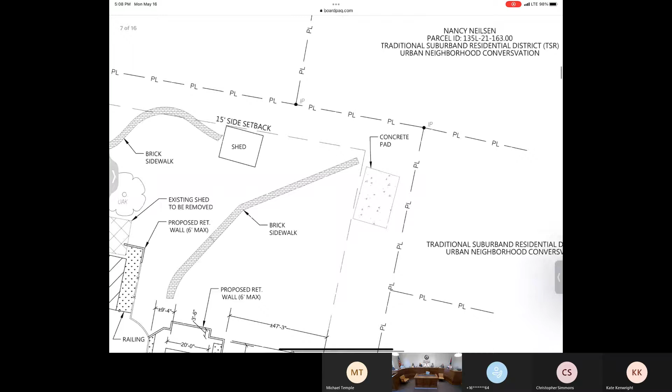The request is for an addition on one side of the house, also the addition of a pool, and some other modifications. The request does not include the new carport or a demolition of a small outbuilding that is there. Frank, welcome. Thank you, Frank Tindall, representing Dr. Walker and Melissa Swaney.

So let's just start with the pool. Like Kate said, it's very simple, it's just a rectangle, dropped down 18 inches. It's not visible from anywhere but the property and the house. I do have fencing all the way around the whole yard, and we're working with some existing retaining walls on the house side of the pool, and on the back side are new retaining walls that will be less than 6 feet, hopefully about 4 feet.

So we're connecting the existing brick sidewalk and steps, and then the decking around the pool will be bluestone, and then we'll do appropriate landscaping.

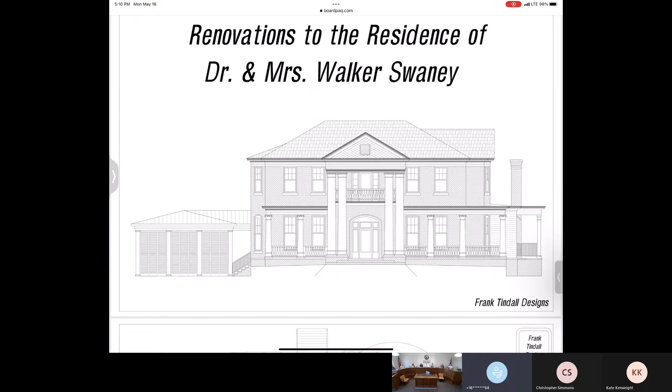It's certainly one of our most attractive residences, and you do such a good job of keeping it attractive and celebrating events, so we appreciate that very much. Any questions or comments, maybe if you took us through a couple more of the...

Well, do you want to go ahead and talk about the addition now? Are we done with the pool, or do you want to vote on it? No, go ahead and tell us about the addition too. Okay, please. All right.

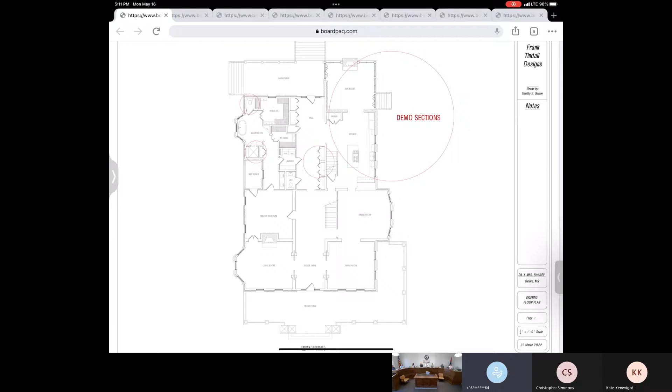So the addition, that's existing kitchen and family room. If we go to the floor plan, the new floor plan is here. We're going to renovate the new kitchen as is. There are 3 windows in the kitchen wall, and we want to eliminate one of them that's not original. The other 2 original windows we'd like to put together over the kitchen sink, so we'll have more cabinet space. And then we add 12 feet out to the south, which is a pantry, and 12 more feet to the existing family room.

The existing family room has square pilasters with windows in between, and when we add the 12 feet, we have the exact dimensions to keep the symmetry going with the windows between the columns, and it looks more like a sun porch. And then there's a small 6-foot porch on the south side of that.

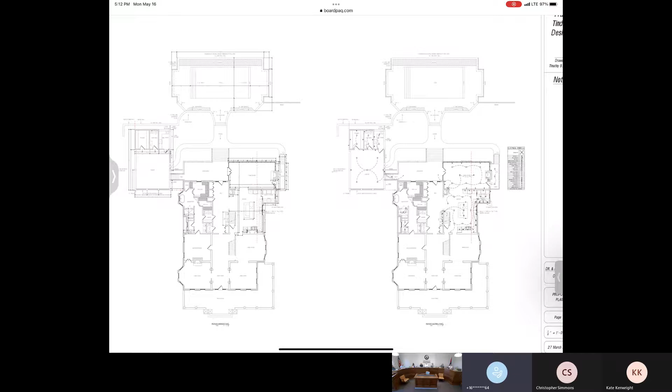All of that existing addition is all painted. We'll be using no-rot products that look like wood, and in the pantry area we're proposing to do horizontal hardy board, painted white. We'll be patching the kitchen window, the second one from the bottom, where I have the windows put together.

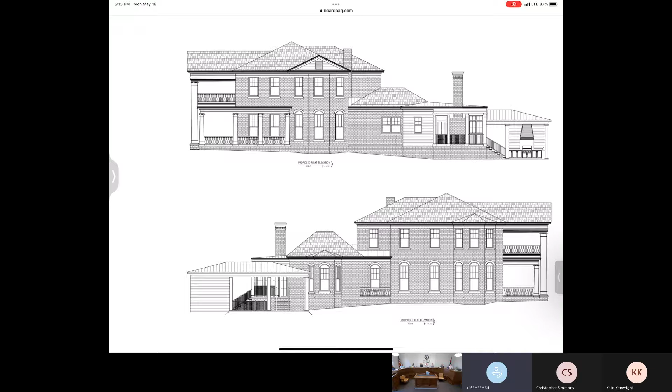We'll be patching that brick. I've located some antique red brick that's close, but we're still looking for the perfect match, and we may be able to use the existing brick we have. When we go into the pantry area, we could steal a few bricks from that 9-foot section, and we may be able to gather enough bricks there to make that wall look like it's never been patched.

And Kate said copper roof, but we may be doing copper-colored metal just for cost.

The fireplace right now would be in the view of the pool, and it was built incorrectly, so we're going to put the fireplace on the south side so we can view the pool and get a better working fireplace. It will be red brick.

This is really not easily noticeable from the front view of the house, with a lot of vegetation. So nobody, when you drive down the street, will know what we're doing. Yeah, really.

Will the fireplace be the same color as the house? Because you can see that from the road. Yes, red brick, just due to the height of the fireplace. Right, red brick.

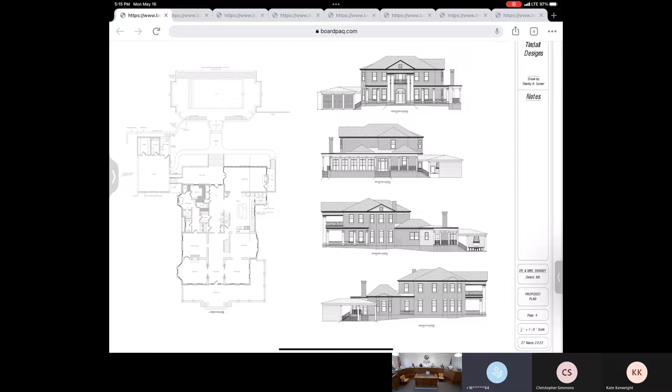We have a phase two on this that we're still asking for permission for. Over on the side of the house, on the bottom picture, there's a carport - if you zoom in, that little window with the little balcony, that's a small porch with a window on it, only about 4 feet deep. We were proposing to do a little bit of renovation in the bathroom and bring that wall out to the railing, where it's just a foot deep, but it would look the same as it looks now.

I thought of an option for that wall, because we're going to have to remove those bricks - maybe reuse those bricks over on the kitchen window and put siding in there, if anybody objected to that. I think we could go either way depending on the bricks, if we have trouble finding them.

Does anybody have questions about the modifications and the addition on the rear of the house and the new fireplace chimney, which are the official requests today?

If nobody does, then I'll accept a motion to approve those items as presented. I'll second. We have a motion and a second. Is there any other discussion on that question? If not, all in favor signify by saying aye. Aye. All opposed?

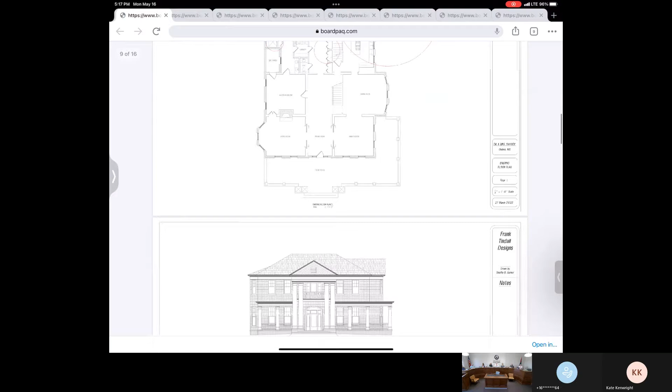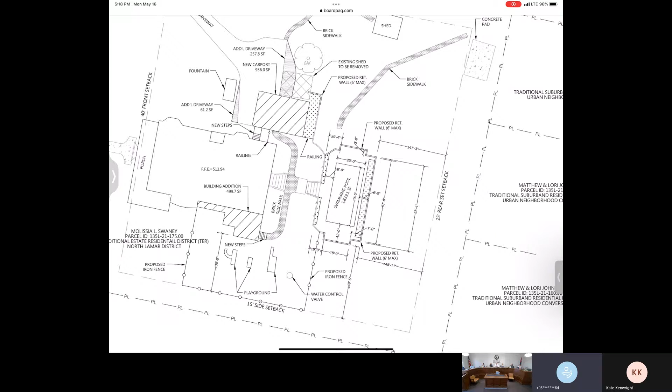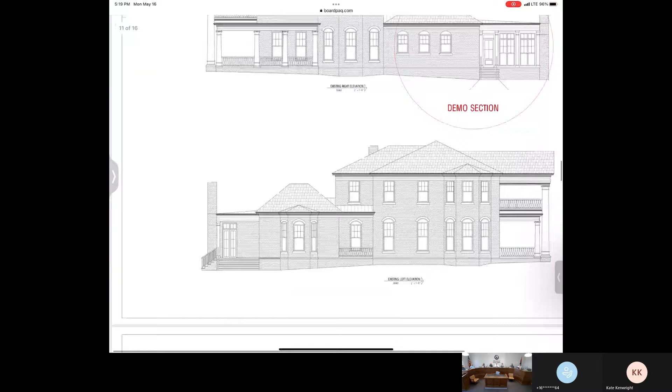We do have another outbuilding that's a charming little building on the back side. Looking at this building, we can't add on to it to make it a carport or modify it in any way - I think it would cancel out any... sir, ma'am? Okay. It's in serious disrepair. It's been added on enough that a good bit of it is new, some of it's still original.

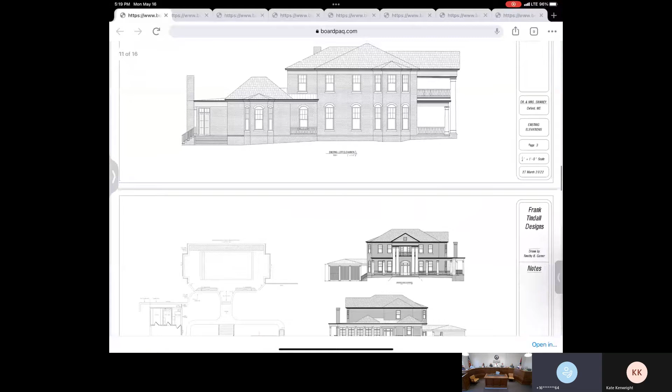Is there an exterior photo of the building? We didn't do it, but I've got one here if you want. Just a little white frame.

So as far as the outbuilding goes, any way that I do a carport for them to get out of the rain, it's going to touch or be within a foot of that structure. I've looked at turning the carport this way, that way, up, back - any way you do it, the shed is just in the way.

They've fallen down the steps, each of them, in slick, wet conditions, and they would like to have a carport that they can get in and out of the house safely when it's raining. So that's the purpose of it. We know that's a somewhat contributing building, but there's no way I can add a carport without involving it. So that's why we're asking for removal.

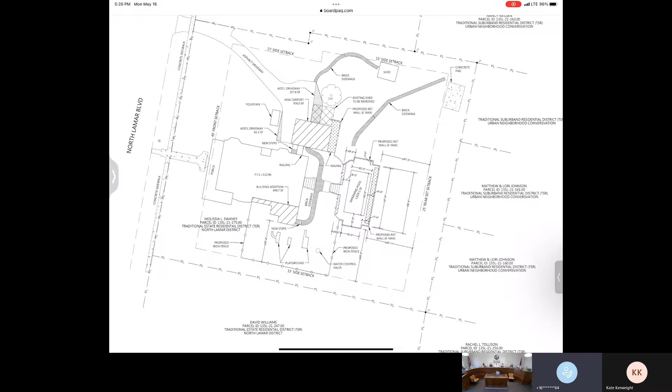This is a complimentary review, so it's really the time for anybody that has any questions or concerns. This is the opportunity to raise those, so they will have an idea of what kind of reaction we might have if they come back for an official request.

I'm just curious, is that little building on the registry? Is it a contributing structure? It's listed on the resource inventory for the main house as contributing, which is one of the reasons I think they decided to go complimentary, just to get a read on what the commission is thinking regarding that building.

It's pretty altered. There's some original exterior siding remaining, but it has been replaced a lot over the years, and there's nothing on the interior, it's just an exterior kind of lap siding shed, so it would make sense that some of that siding has had to be replaced. It's got a shingle roof on the front and an old tin roof on the back.

I think your issue on safety is real important, as a commission we always look at that. And if it is a safety issue, whether because it's in bad condition or because it's awkward or hazardous for the residents to use, then that's something that we would really pay attention to.

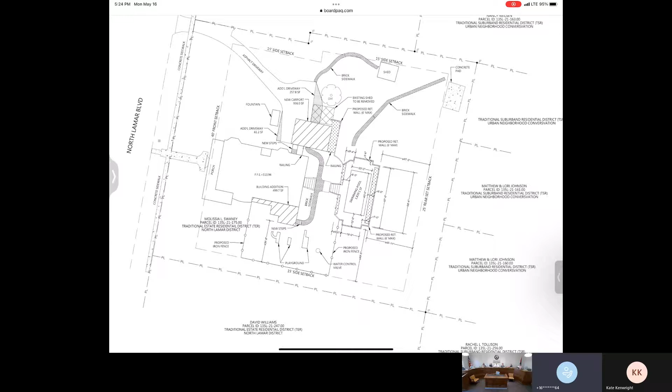Kate, would you move? I'm not picking up the internet for some reason, so. There it is. I'm trying to keep it as low as possible.

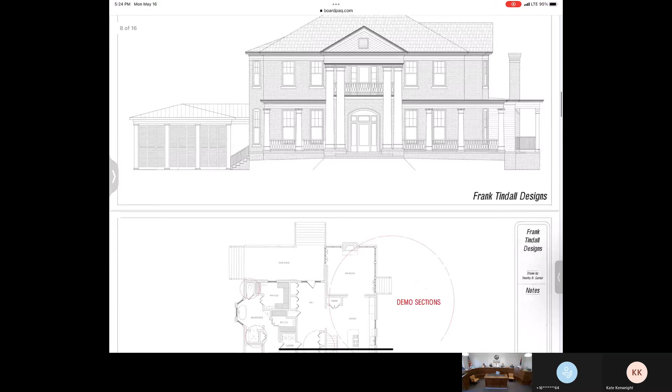There's a large hedge in front of it, so you are not going to really notice it from the street. But I have kept the pitch low. I've changed the roof to a metal roof that makes it look different, and shutters between the permacast columns on that elevation, and then go to the next elevation. And it sits pretty far back from the front facade of the house.

Way back, way back. So the bottom one would be the elevation, the north elevation, so it's a carport, so the columns, it's open, and then the storage room is to the left with HardiePlank siding. So it's very, very simple.

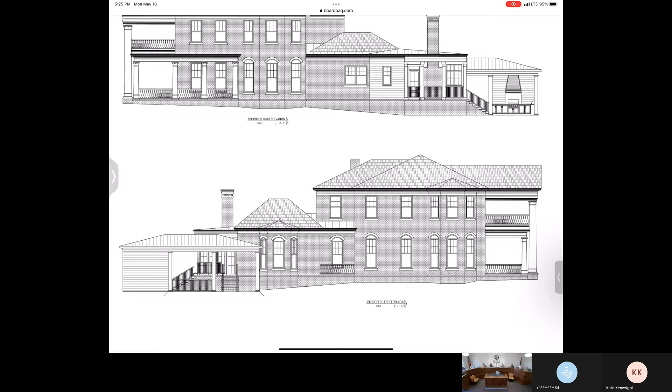And the next one, second one up, shows a little grill area facing the backyard. It has iron fencing on the backyard side of the carport, and then the south side is just Hardie panel. Looks very discreet. Well, it's 42 inches below the porch, which helps keep it low, and we have to go down the steps anyway, so the steps will be under a connecting cover, and then that way it can be down on the existing level.

Are there any questions or comments about the carport addition? It appears to be a good design and appropriate. So, again, we have no negative comments, so I think that's a positive as you go forward. Thank you for coming in. Thank you, appreciate it.

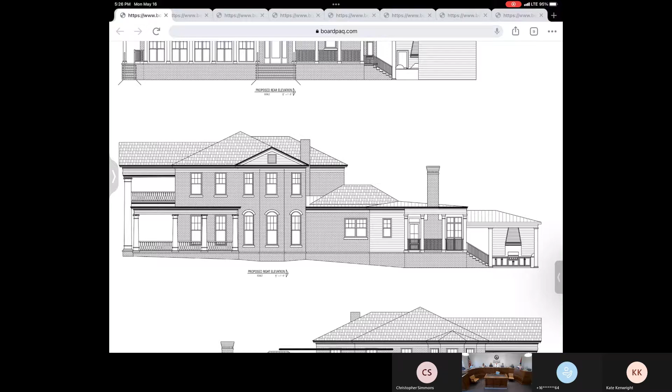The next case on our agenda is, two pages, I keep going back to the first ones, 678. Public hearing requested by Britt Boatwright to add a new pergola, wood screening, fireplace and outdoor grill, and new lighting at 604 South 8th Street.

Okay, this house should be familiar to you all. The applicant received approval for renovations to the existing house in July of 2021, which included raising the existing back deck to the same plane as the house. It's kind of an interesting backyard. It has a very steep drop-off, and it backs up to Dixieland, which is a very large property.

The further additions to the deck proposed here are all in the rear yard deck area of the property and will not be highly visible from South 8th Street, other than previously approved stairs, which you may see but are pretty minimal. The pergola will not be visible over the ridge line of the existing roof. The proposed fireplace and screening will sit in the recessed area behind the existing line of the side elevation. So there's an addition to the house that's recessed from that side elevation, and so you're not going to see those items.

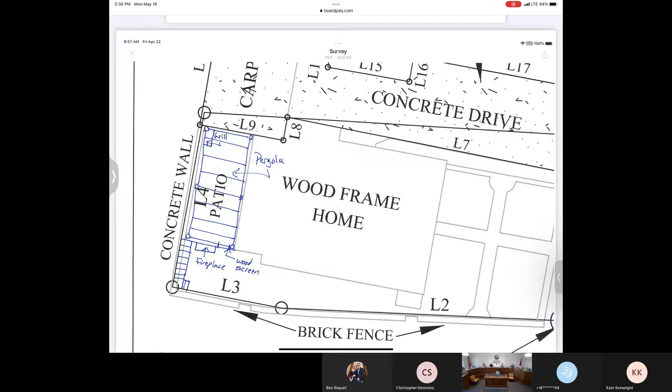Next case is number 679, COA requested by Phase One LTD to build a new house on the existing empty lot at 504 North 15th Street.

The applicant requests approval to build a new single-family home on the existing lot on North 15th Street. The proposed house will be one of what the applicant has named the Porchview subdivision, which notes this building and two homes that were the subject of some administrative approvals, number 680A and number 681A. The reason we saw those administratively is that they were already approved by this commission, and the COA had expired. It had been over a year, and there were no proposed changes to those plans. So the applicant was able to move forward and get those approved.

This house has not been seen by this commission, though it is very much in the style of the other two houses that the applicant is building on North 15th. The proposed house features materials commonly approved for new construction in the historic district. There's an asphalt shingle roof, Hardie siding and trim, wood columns, and a brick veneered foundation.

The house plans include a detached carport at the rear, which will be connected to the house by an arbor. The proposed new building is appropriate in scale and is oriented correctly on the lot, with the primary entrance and facade fronting North 15th Street. The proposed Hardie and asphalt shingle are common for new buildings in the historic district.

The plans are very hard to read. I don't know if it's a technical issue, but it's difficult to see a lot of the detail. Does anybody have any questions or observations about the house? Yeah, that's the one that's a little scrambled. Mr. Garner, I just mentioned that.

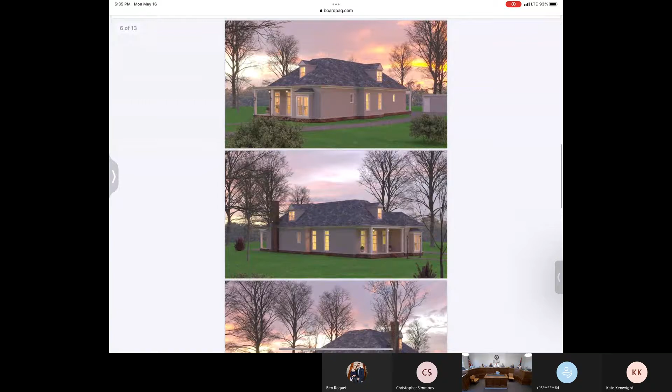Yes, sir, my name's Jay Hughes. The difficulty with that drawing is without clicking on it, it keeps all the lines on it, and I understand that's hard. We also generated these 3D drawings to illustrate it—Archiviz did that. I don't think it truly captures the essence of what we're doing in terms of style. I hate that it didn't show the driveway better, but true to form for that time period were single wide driveways that went deep back, and that's what was allowed.

Okay, yeah, there's the site plan. Sonia, if you can see where it says 504 on the left, that's 12 feet wide and goes all the way back, opening into 2 and then 2 car parking spots, the full depth of the house. The house is set back 20 feet, then there's another 67 feet, then the 24-foot deep garage. No, ma'am, I had it straight—the planning department wanted to give a curve to it, and so I agreed that's what they wanted.

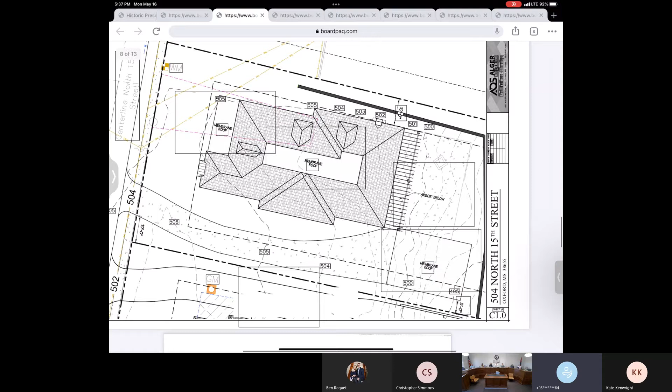And we will provide the window schedule—they'll be SVL or top of the line Jeld-Wen or Marvin. Are there any questions about the design of the house from any commissioner? I just think it needs more windows. Oh, gosh, it's got $37,000 worth of them. Show the side there. The windows correspond to the rooms. Of course the front—that front room on the right is a bedroom, a guest bedroom, so it's got the bay window out there, a double wide, and the right side wall is the place for a headboard in that room, as we do try to think about furniture layout.

Any other questions or comments? If not, is there a motion that we approve COA 679? I make a motion to approve. There's a motion, is there a second? Second. Motion and a second. Any other discussion? If not, all in favor, please signify by saying aye. Aye. All opposed? The COA is approved. Thank you. Thank you very much.

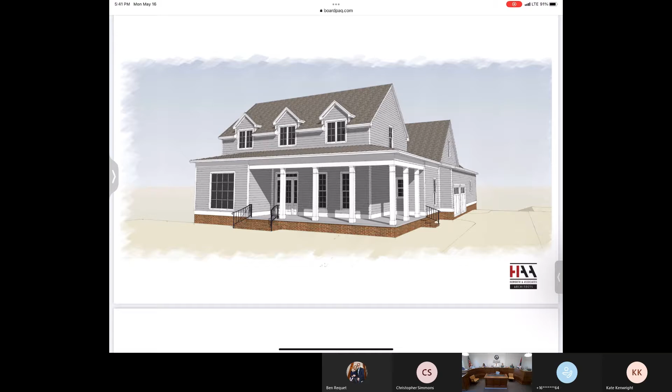Really? Not to the knowledge. What about the driveway? I think there was some concerns about coming onto Lamar at one time, when we talked about it initially.

It is where it is. I don't think there's any issues with the engineering department for that driveway being there. It is very close to the intersection of Old Taylor Road, but every other driveway along there connects onto the street as well in that stretch.

I had a concern only personally, because I exit off of Old Taylor Road all the time, and I was wondering how that would affect me. Now you have to look three ways. It doesn't have anything to do with what you're asking, it was just personal.

It's good sight lines from that. Was the intention always for the lot to be brought up to street level? Yeah. Once the foundation level, which would be the lowest level, is built, then it can be backfilled to create the front yard level with the street.

It's a nice looking house. It's a lovely home, closer to the original design. We did have an application for painted brick - a prospective buyer wanted that approved, and we did, but the McCurdy's are going to live here themselves, so for Megan, we put it back and changed the dormers to be a little more traditional. But it's very similar to what was approved twice.

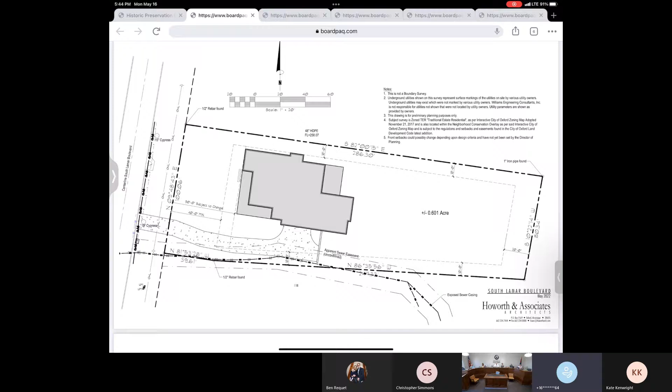Next item on the agenda is case 683, COA requested by Brad and Tatum Freeman to replace exterior siding, the front door, and the front stoop, as well as add a railing at 1420 South 10th Street.

Okay, this one should look the most familiar because we talked about it last month. The applicant received approval two months ago in March of 2022 for several changes to the existing structure. It is listed as contributing in the historic district.

The door is too tall for the proposed opening, and the applicant proposes to cut the door to fit the existing front entry.

I wouldn't say that the proposed door is the same style as the existing house, but it's pretty simple in style. It looks to me like one of paired doors that would have gone in a Queen Anne house, or maybe an Italianate house based on the scroll. But it's not inappropriate for the property.

The only concern, and this was made a staff condition, is that the door wouldn't be the correct width for the door frame, and maybe Jonathan can address how that would be addressed. It is? Okay, great. And then they're planning to cut the door down to be the correct height.

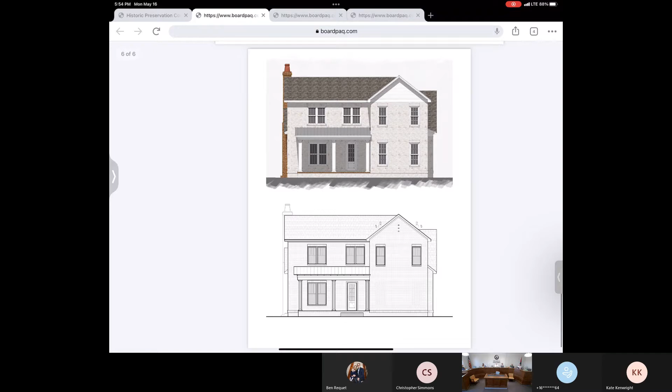The two windows in the lower right are in a master bedroom. There are other windows in that bedroom, but they look right into the side of a detached garage, so they really don't do anything other than look at a wall. So we propose to remove those windows. It's very difficult to see in this, maybe you can see it on your computer, but we kind of have an outline of where the window would be, and within the brick we recall that shape, but we don't need those windows.

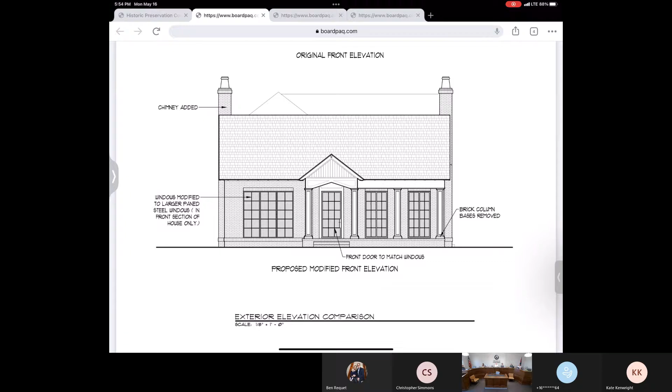So we've asked permission to remove those. I think the addition of a new chimney on the front, giving symmetry to the other one that's there, is probably a pretty straightforward request. From there, we're talking about the different style column and base, and the different style windows, which are requests of family members of the owner.

It must have just been the illustration I was looking at before, because the height of the roof here is the same. Yes, there are no modifications to the massing at all—the one we were looking at earlier looked like it was twice as tall. It's simply changes in the windows, which would only be in this front section of the house. Along the sides and back, the traditional windows we already had would remain.

So we're just talking about these windows—this is a dining room on the right and living room on the left. So the windows, and then the plinth, or base, under the columns is taken out, which was sort of the craftsman nod that existed before. Those columns, as shown in the lower image, are the same columns we have on the back of the house, which were approved on the back. But we did think the brick bases added to the detail of the house, though we've been asked to remove them.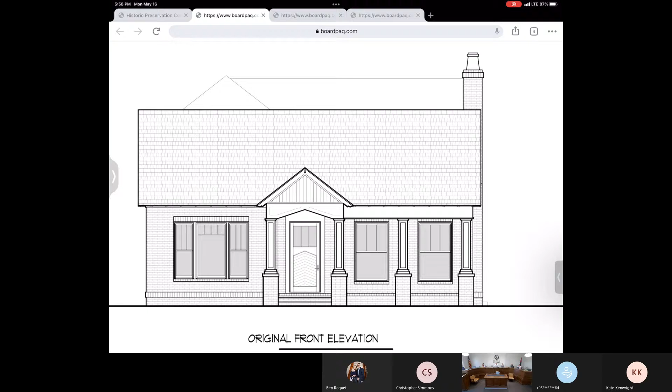We spent a lot of time talking earlier about the owner finding a design that would blend and be more of a bungalow look, and I don't know that they've retained the bungalow look with the changes you're suggesting. Jonathan, I think the columns and base in the original front elevation is something you don't see everywhere, and it gives it charm, where the proposed columns are everywhere—so you kind of lose the personality of the house.

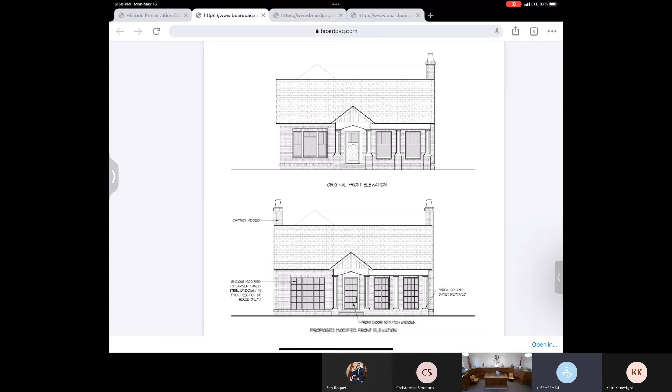I still like the second chimney. I do like that, but I just think it's been changed to not be what it is.

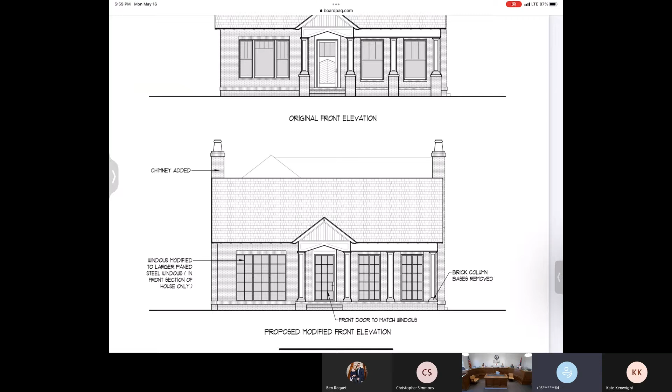I'm curious, Jonathan—the front and back we see, but we don't see the sides. Are they getting any light through the sides? Yeah, there are windows on the side. Okay, is that previous case file available? I didn't bring a printed copy of it either.

Because I like the additional chimney too, and you often see in craftsman style houses, if I'm correct, the flank windows that flank chimneys.

Jonathan, it's not sounding real good here. Could be 2 out of 4. And just to repeat what everybody here has said in one way or another, the new windows that are being proposed just don't seem to harmonize as well as the early ones that we approved. And the columns and the loss of that brick structure on the bottom not moving forward into this proposal has the same effect of sort of missing the mark on the bungalow that we approved.

Does anybody want to add anything to that? Just, can you refresh my memory, didn't we approve this for painted brick as well? Yes. I'm not sure it will be painted, it might be a light brick, but we did. Yes, as a last resort.

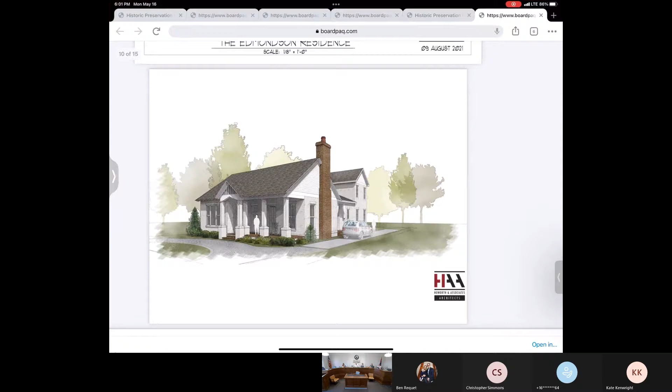Do we want to discuss at all, there's been comments about the fact that the windows that are proposed are metal, and it sounds like the owner would be willing to consider wooden windows, but the size is the issue. So I think we've got two questions, and that is our opinion of the design of these windows, even if they were made of wood. Any comments about that? The new proposal is just a completely different configuration of lights in the windows. So for me, it's not so much the material it's made of, but rather the configuration of the lights, the panes.

I understand. Any other comments or questions for Mr. Maddox? And just sort of suspecting how the vote might go, is this one that we might want to consider tabling? Which would be the easiest result to deal with for the owner?

Well, that's up to the applicant if they would like to table, but I believe the choices would be approve, deny, approve with conditions, or changes. So perhaps the rear elevation changes and the chimney. Yeah, I'd welcome suggestions from the commission. And then, Jonathan, if you are interested in tabling, you could certainly speak up. I don't know what that would do.

Yeah, I don't know what the outcome of tabling it would be. If you're not leaning towards allowing them to have those larger windows, I'm not sure what we would do other than just simply go back to the way it was originally designed. It appears that we are favorably impressed with the addition of the chimney, but other than that, not so much. But those, the chimney and the rear window can be voted on and approved in another part.

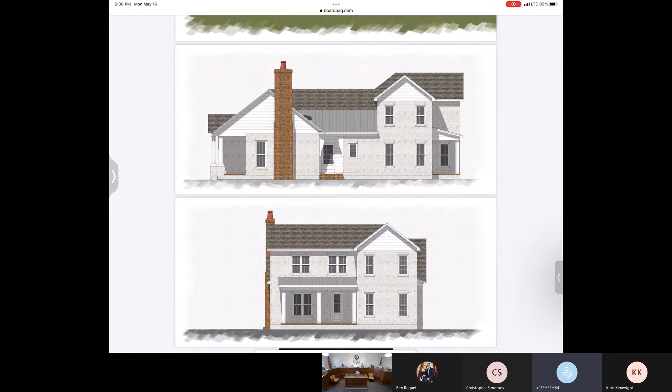This is a complimentary presentation for 719 South 8th Street. Am I ahead of myself? 719, yeah, 8th Street. So I'm gonna let Jonathan present.

We generally let the client or applicant present a complimentary review since it's simply for feedback. I will just note that the building is listed as contributing in the historic district, and it is described as a one-story, 5-bay brick veneer. This is not the right description.

It is, yes, it's clear. Oh, it is, okay. It's not really that big, but yeah, okay. With craftsman influence, built circa 1925. It's listed as contributing in the historic district.

So this property has been a rental for a very long time. The primary structure that you're looking at in this picture, and maybe we can scroll down to the first page of pictures, is 2 apartments, and then there is an outbuilding directly behind it that is 2 more apartments, and then there's a 2-story building on the right, that has 1 apartment down and storage above, but at one time I think was also an apartment on the 2nd floor. The new owner of this property wants to turn all of that into one single-family residence.

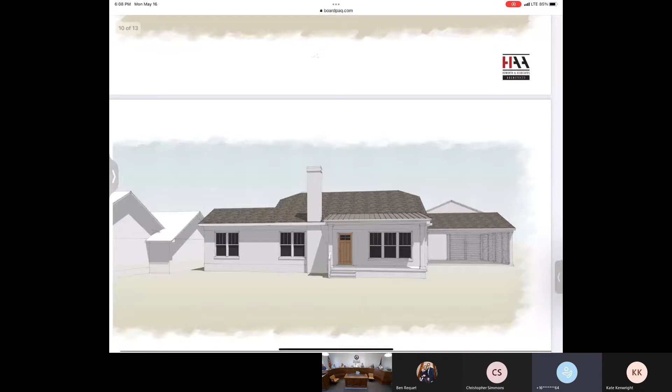If we could look at that site plan view, in addition to being 2 apartments, it's also been added onto numerous times. Back up to the site, that view right there. So the center core section is what we believe to be the original structure, and then everything that's shaded solid gray are previous additions, including the front porch, and a carport structure on the right, some sort of media room on the left, and then the second apartment in the rear.

We have worked on a design for converting this into a single-family house and are able to do it with a modest addition on the upper right that's shown with line hatch, and we'd like to put a porch along the rear of it, as illustrated by that dashed line. However, it's very chopped up. There is no quality materials in the house anyway.

I want to get some feedback from you guys about how important it is for us to sink all the money we're going to have to sink into rehabbing that structure to really work as a single-family house. Now, I will say that my clients are very happy with the overall floor plan design. So if we were able to remove that structure and start over, we would build back essentially the same floor plan that we are going to do for the renovation. But it would certainly make a lot more sense than trying to open up all those interior walls.

To really satisfy a family living there with multiple children, we need a little more room than even that modest addition can give us. So we'd like to go up into the second floor, which we do on the rear in some way. Obviously, what's there now can't really be counted on to support even a partial second floor. So yet another reason why we would all be better off if it were new construction.

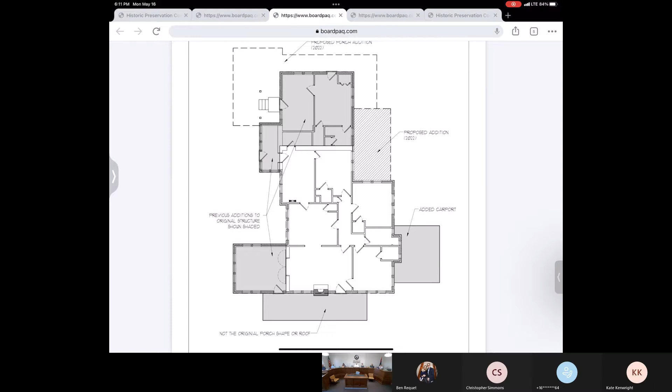What kind of condition is the core house?

Is it level floors, unlevel? Because it's been added on to a couple times, there is some wonky ceiling height, in the 8 feet primarily, although one of the additions is shorter than 8 feet, probably 7'2".

The neighbor to the right, whose name I'm blanking on, who has lived in that property next door her entire life, and I think she's probably in her 70s, recalled that the house was originally not painted. It had a very small front porch, full fireplace, and that there used to be some structure on the roof.

And we've got a partial picture. I didn't bring it because it's really not clear at all, but there was either some sort of dormer or front-facing gable or something like that on the original structure. It's until we really get up in the attic and figure it out, I can't really say how that might have been before the porch was added.

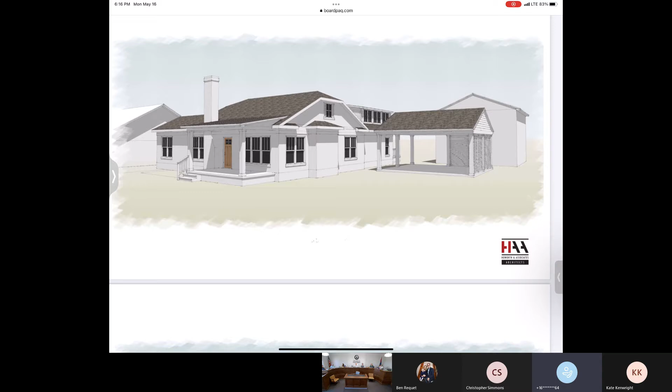I'm curious, if you want to tear the house down and start again - and I understand it's less expensive to tear it down and start again - I find it interesting that they want to build a new house that looks a lot like the old house. Is that just in deference to the neighborhood?

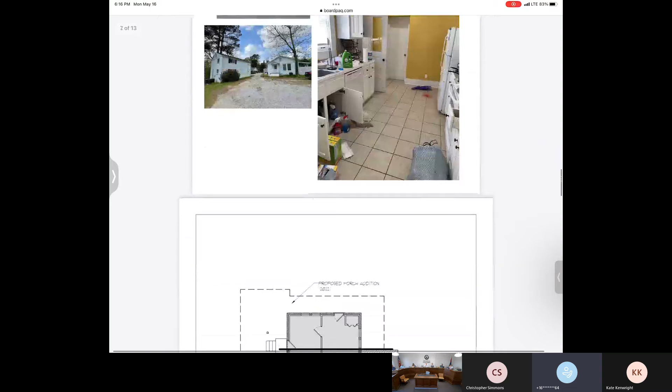Yeah, I think they like what we think we can turn that house into. But the A to Z on it is pretty crazy when you consider how you would renovate it to get there. One liberty we took in the rendering is we've increased the steepness of the pitch of the roof a little bit. The roof's very flat on the house that's there now. It has those jerkinhead ends, which we would do again, and a gable window in the end, although the attic is like 4.5 feet tall, so you can't stand up in the existing house. I don't know why those windows were up there. We'd beef that up a little bit because, not that we want to occupy that portion on the front, but it will help us screen to a two-story in the back.

I think it looks wonderful, much better, but I'm really conflicted. We're all about preservation, and we make people jump through lots of hoops to tear something down. It's got to be structurally dangerous and many other words. I just ask you to take a hard look at what it is that you're maybe wanting to ask us to keep. I'm wondering if, once you get into it, you won't find serious problems, being that, A, it's been added on many times, B, it's been a rental property and not taken care of.

I'm curious to know what will happen if you started renovating it, like what happened before. It's not as old as the other house - I think that's part of what I was saying. It probably is in better condition. No doubt there are some issues with it, because it really hasn't been maintained as anything other than an investment property. And the picture of the kitchen, it could just be bad housekeeping.

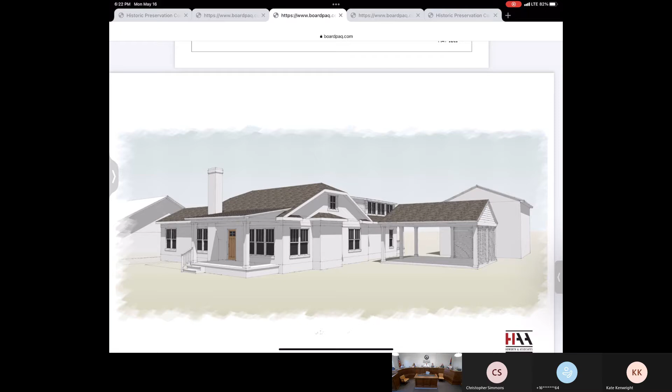Does anybody else have anything they'd like to bring forward or talk about in the meeting?

Oh, I don't know why I'm having so much difficulty with my agenda. I stapled the pages together wrong. That could be a start. I'm sorry, oh no, I'm using my old one.

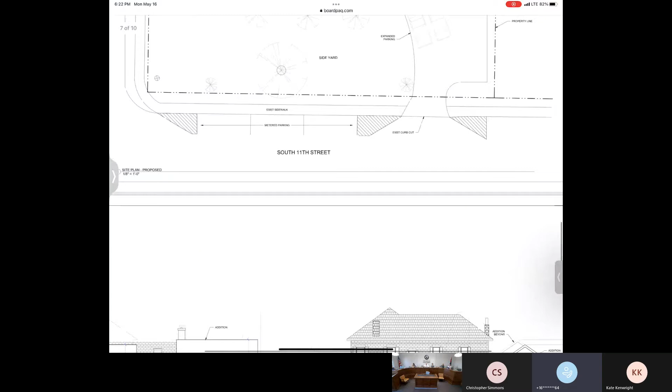Another complimentary review to demolish the existing shed and garage and build a new addition at 1005 University Avenue. Welcome.

For this complimentary review, I'm going to let the applicant's architect present, but I will note that the house is contributing in the historic district, and the outbuilding that they are proposing to demolish - I did a little bit of Sanborn map research, and I wasn't able to find it on the 1910 or 1916. There's a building on the 1948 Sanborn that I don't think is this structure; it's too far back. The outbuilding itself is not listed on the Historic Resource Inventory Survey, and it certainly doesn't match the style of the house. So I'm not sure what the age of that structure is, just that helps.

Welcome, please introduce yourself to us. Yes, I'm Julie Spears, representing John and Wendy Beard.

If we'll look at the site plan first, I guess - this is the house on the corner of University and South 10th. It's a unique house, different from most in the historic district, and also different in the way that it's on the border of the more urban area than the residential streets that most of the houses in the district are in.

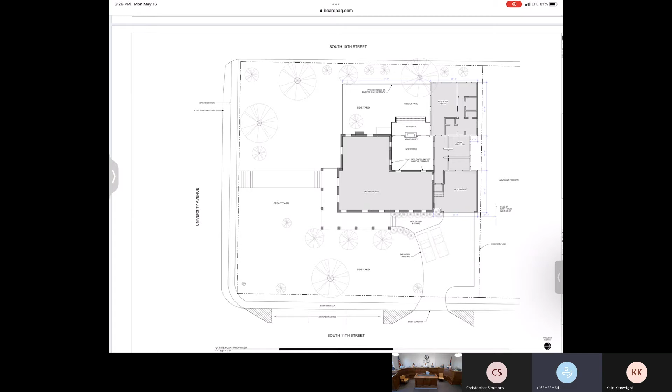Before I go into that, there's also the existing front porch. The side that faces South 10th Street has some screen around it. The columns are round concrete columns on the front and the side porch. We propose to remove the screen - I think that shows up in the pictures that it's kind of deteriorated and poorly done, where it covers up some architectural features of the house. So we propose to remove that screen on South 10th Street.

With the addition, what we've done is we've tried to provide a hyphen between the old and the new. The garage pretty much occupies the existing footprint of the existing garage, and we're connecting the two structures with a low-pitched roof that kind of appears flat.

On the bottom right-hand picture, that is the elevation facing the neighbors, which are the OU Methodist offices on South 10th Street, so that elevation is not really seen from the street - this house has 3 fronts, so this is the one side that is not seen. But what I wanted to point out is - actually, that's the wrong picture, the top left picture is that elevation.

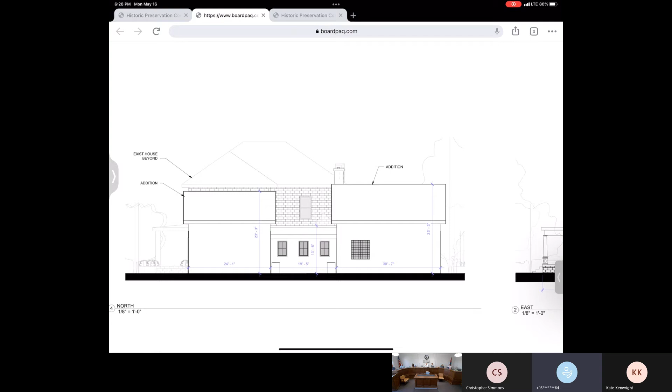I wanted to point out the roofs there, how we're trying to break up the mass of the addition, because in the site plan, you can see that the size of the addition is similar to the size of the house, but we don't want it to overpower the house in any way. So with these moves with the roof, we're trying to diminish the scale of the addition and make it look like detached and smaller structures. I'm really pleased - I think that move has been real successful.

The materials we're thinking about aren't really shown yet on these preliminary drawings, but for the garage and the master addition, we're thinking a siding material, horizontal siding, painted, probably Hardie siding. The roof of the gabled pieces would be asphalt shingles, and the low-pitched roofs would be a metal roof - again, the pitch is low, so that material won't really be seen. And then we have a garage door.

It's a grand old house, and it's so good that somebody's gonna bring it back to life. Are they gonna move in at the Beards? Yes, it will be their permanent residence.

I think maybe one of the main pieces we need to discuss is the existing little Tudor-looking brick outbuilding that would be demolished as part of this. So let's talk about what you see and what you think. Is this the structure that's on the property line? Yes, ma'am, it's a shed. It's over the property line or on it? It's over.

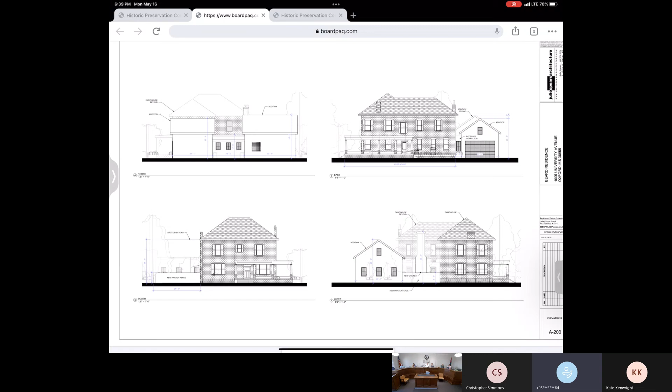The new structure will be the part that goes toward the church. The garage is in the same spot as the existing garage. I think the proportions are better, but yes, the new part is at the top of the screen.

Anybody else have any comments? I don't hear anything negative coming, just questions about materials and so forth, but as far as that outbuilding, I have not heard anything that makes me think you would have trouble with the demolition of it.

What do you call that, the concrete, what's the term? It's called concrete rock face block. We looked it up, this is a Sears Roebuck house, and it was used on some of those designs, manufactured for a very short number of years as an economical, easy to put together option. Is that finish called rustication? Yes, that's the old architecture history term. I also grew up in a Sears Roebuck house myself. Yes, this is a modern version of rustication.